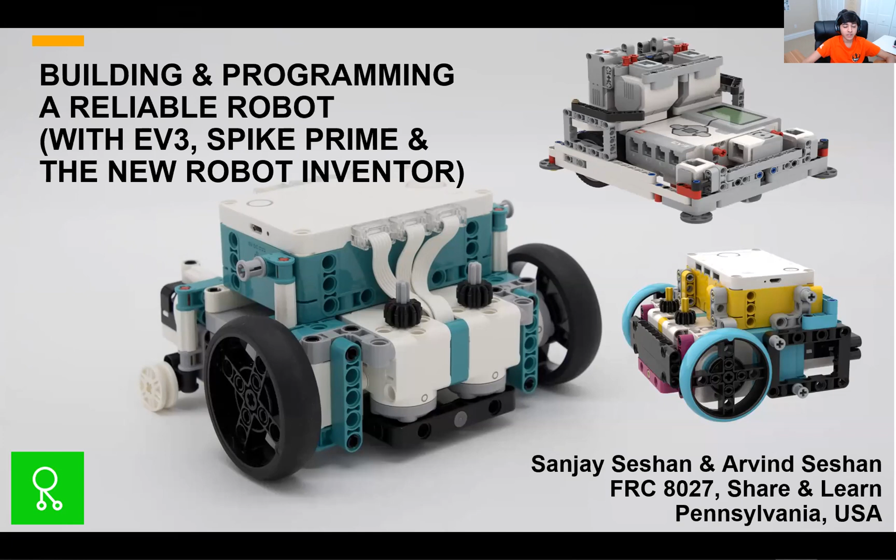So here's a little background on us. We competed in First LEGO League for 8 years. Most notably, we won the Champions Award at World Festival in 2018. We've been doing this for a really long time, as you can tell from the list of things we've done. We're also the founders, and we run FLL tutorials, Prime lessons, and EV3 lessons. Currently we are the co-captains of FRC 8027.

As mentioned earlier, we are going to be talking about reliability today. You might be wondering, why focus on reliability? Firstly, reliability is the number one challenge that teams face. Second, robots often tend to work at home, but you do not get the same results when you go to a competition and run it on competition tables. Third, robots only complete the mission correctly sometimes - for example, you may have a low success rate for a single mission. And fourth, because of the first three, teams get frustrated. We are going to be discussing all of these in the following slides.

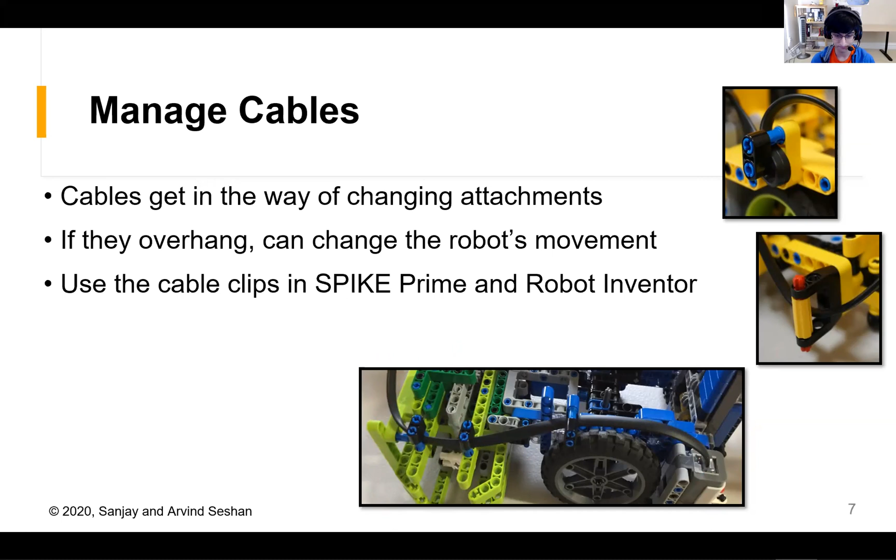Also, somewhat related to the wires, you need to keep your access to your ports open. For example, you need to make sure you can charge your robot. You either have to leave a hole open to replace the battery or to charge it. And that is this hole on the back of the battery if you're using an EV3.

Also don't forget to leave the download port open, because at competitions you're not allowed to use Bluetooth. And of course, leave your wires for your motors and sensors. But note, on the Spike Prime, the download port and the charging port are the same USB port, so you only have to leave one port open.

And actually, on another note, you cannot just take out the battery and charge it separately. You have to have it plugged into a hub in order to charge the battery.

And everything Sanjay just said about the Spike Prime also applies to the Robot Inventor. Yes.

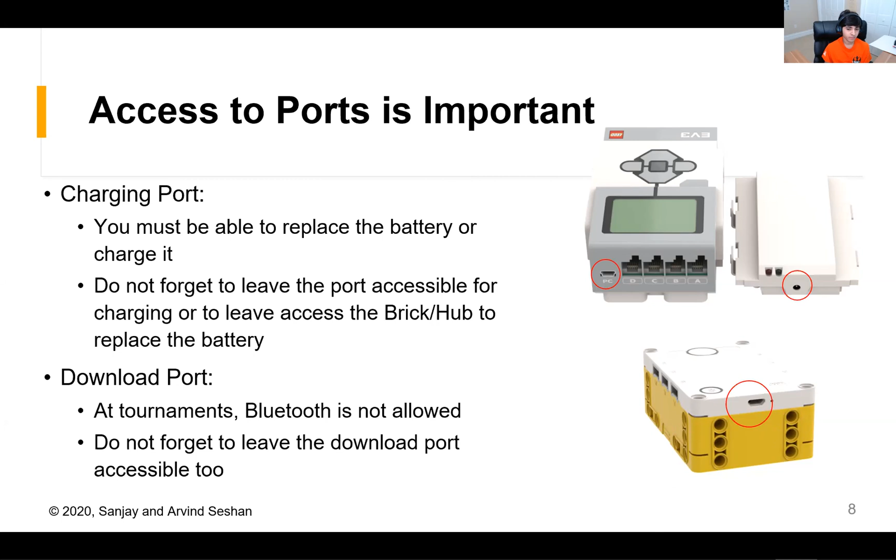Next, we want to talk about how you can build a robot that navigates reliably. There are three things that we recommend. The first is having an outer wall. An outer wall will help keep your wheels straight and not bow or bend out, and it also allows you to align on walls as well as ride walls. We'll show examples of this in just a second.

The second thing is to use color sensors. Color sensors can be used to line follow on lines that are on the field, as well as square up on those lines. And finally, as I mentioned, wall riding helps you stay straight, and that can be done not only by having that outer wall, but also sometimes having riding wheels along the wall to help make the riding more smooth.

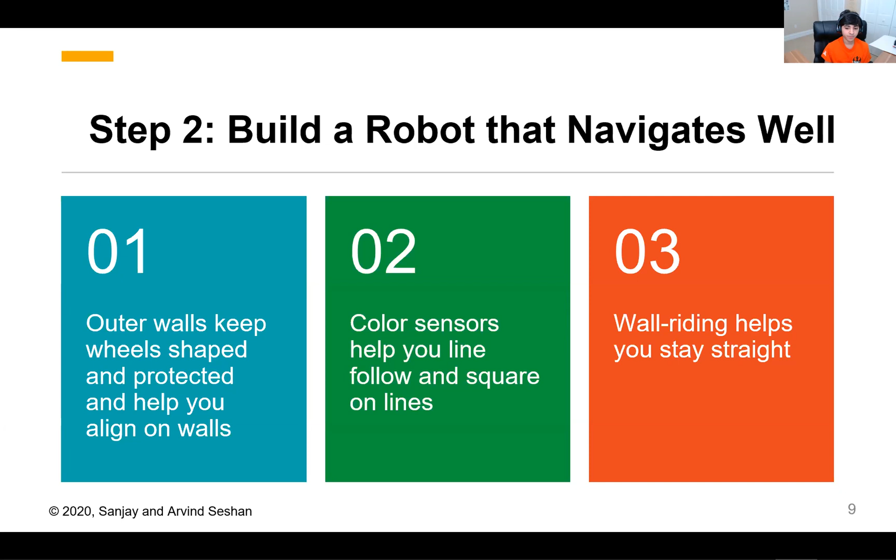Now let's look at how we can apply these techniques in action on an actual competition robot.

This is an example of DroidBot C, and as you can see, it has an outer wall. An outer wall is basically a set of lift arms that go around all four sides of the robot. The lift arms on the front and back allow the robot to drive into walls and straighten out. The outer wall on the sides allows it to ride along walls. And if you notice in this build, we actually added wheels along the outer wall to allow it to ride along more smoothly.

There are two color sensors that are separated from each other at opposite sides of the robot, and this is to make the squaring up on lines more reliable. They're also far away from the drive wheels so that it makes the line following more reliable. You also notice we have a low center of gravity with the brick being low down. This will prevent jerking, and there's also level construction, which is important for weight balance.

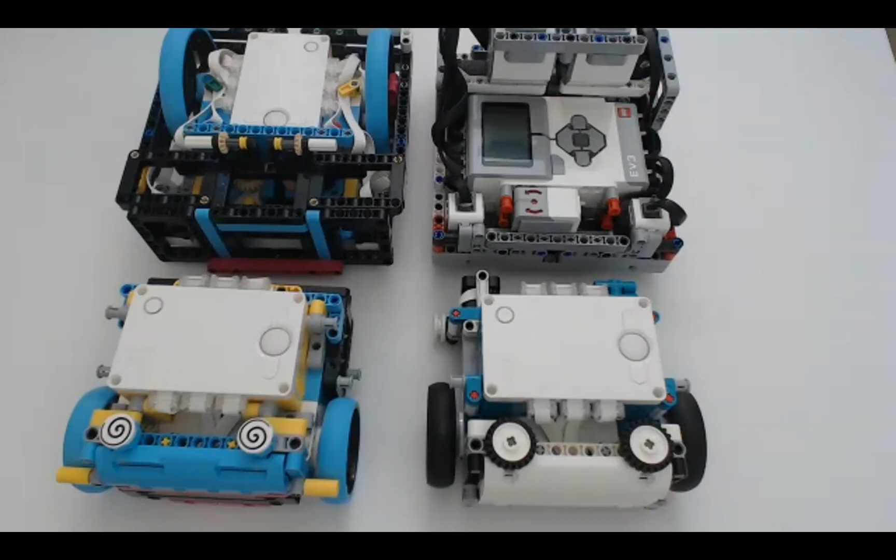At this point, I would like to switch over to an overhead camera to discuss how these features can be applied to different designs.

So this is an example four robots. The DroidBot C, this one is the one we just looked at. Now let's try and identify similar features in all of the other robots.

Let's start with this one here. This is DroidBot E. DroidBot E has that same outer wall that goes around the entire build, which keeps the wheels sturdy and can be used for the same purposes as DroidBot C. Also notice that there's a low center of gravity to prevent jerking, and also a level construction.

These two robots, this one is built using the Spike Prime, and this one using the new Robot Inventor set. These are attachments, but we'll talk about those in a second. There's a flat surface in the front and back to allow for aligning on walls. To make this build as small as possible, which was the goal here, there is no outer wall, but it isn't too necessary in this case. These robots also use very minimal parts and are connected very well in a sturdy way.

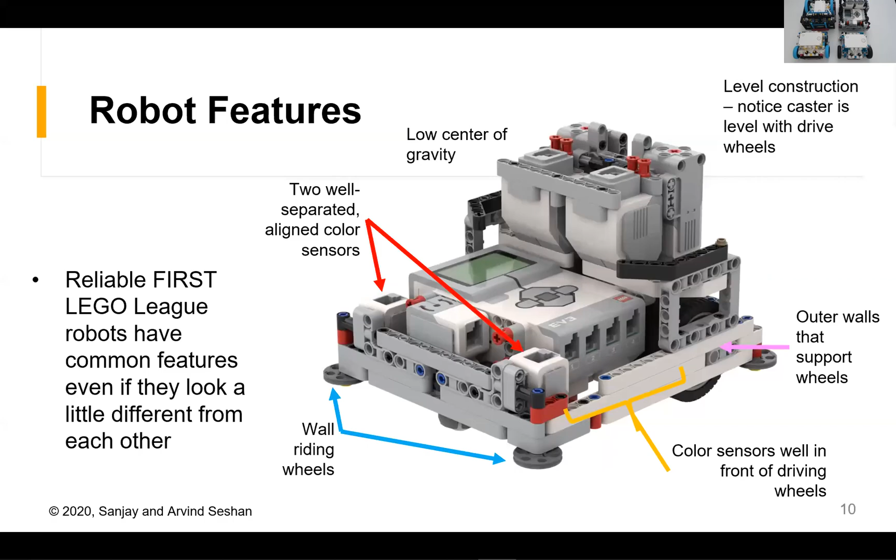So I kind of went over the next few slides live.

Next thing I want to talk about is some aspects you have to consider when designing your robot. The first is height. Notice I was talking about how all the robots had a low center of gravity. Top-heavy robots tend to be very imbalanced, and when they drive quickly, they will jerk, meaning when they stop abruptly they will tip forward or backwards. This is not something you want, so having a low center of gravity solves this issue and also allows you to travel at faster speeds, reducing time as you travel across the board.

The next is weight balance from left to right. You need to make sure the robot is symmetrical so that you don't have more weight on one side, which can cause the robot to not drive straight and swerve.

Next thing to consider is the size of the wheels you use. Large wheels are fast, but they are harder to control and tend to be less reliable than smaller wheels. You should find a good balance between a large and a small wheel to maximize your speed and reliability.

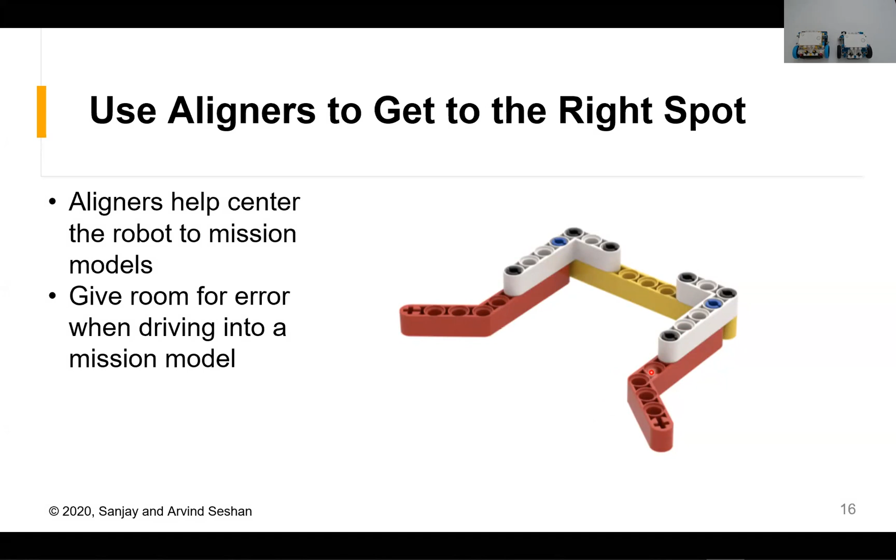Next, we're going to talk a little bit about some attachments. The first one we call an aligner. The way this works is we have these two bent lift arms on the edges, and you can use this when going into a mission model to actually straighten out your robot. This allows you to have a little bit of a margin of error when going to complete a mission.

Arvind, did you have some attachments that you could show us? Yes, and I will show them right now.

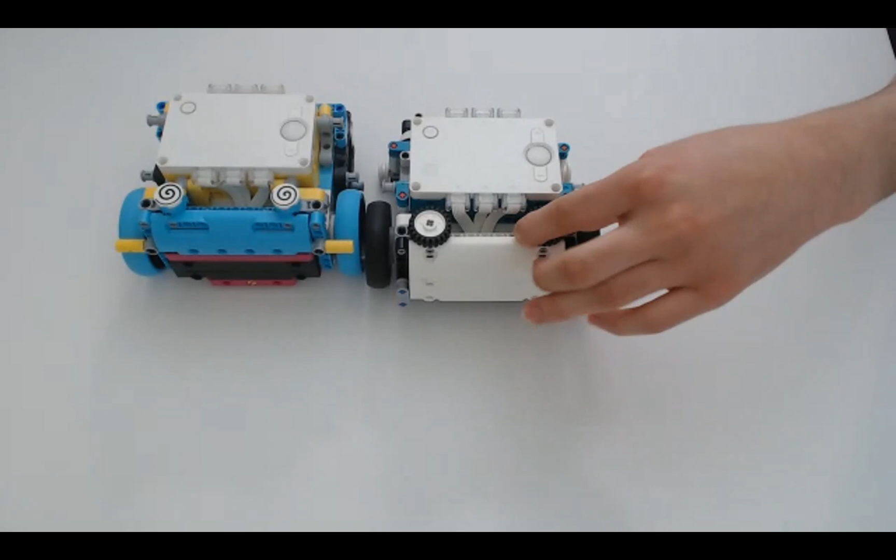So these are the two robots I was showing earlier. This is an example of an attachment that comes on and off very easily. It actually uses this gearing mechanism where the gears will mesh with each other when the attachment is placed on. Notice that the axle here sticks out one past the gear, and this is to make sure the axle goes into this lift arm here, so that there's no slipping in the mechanism when it is on the robot. This robot has a very similar mechanism with the same gearing.

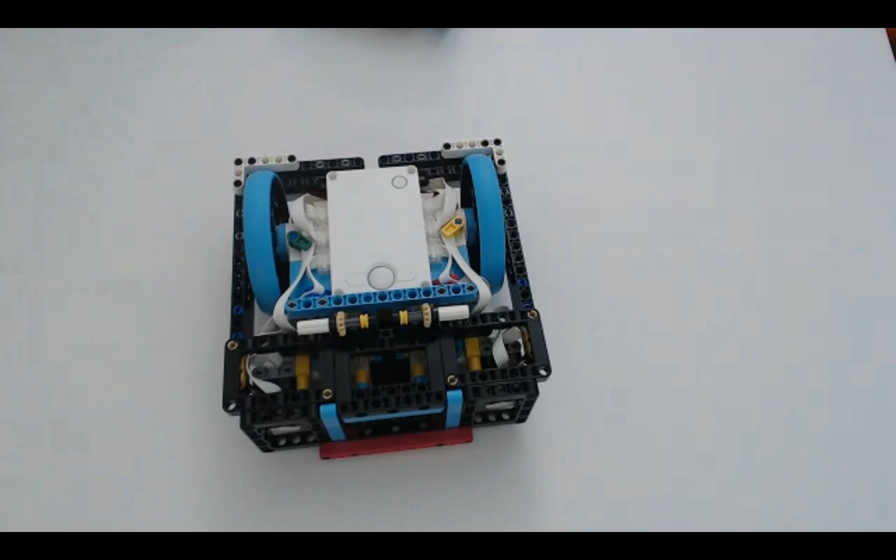The example in the slide was with this robot, which has a larger attachment that goes around the sides as well, and has the gearing on the bottom and an axle that goes into the attachment to make sure there's no slippage. This reduces time you have to spend in the launch area setting up your attachment, because it comes on and off very quickly. Now, I know Sanjay was also talking about aligners, so I wanted to show an example of an attachment that we created that uses aligners.

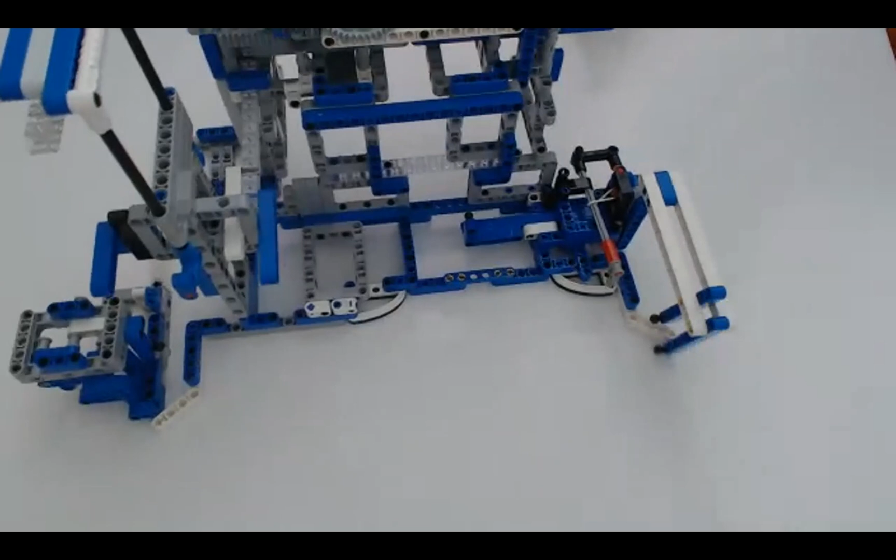You can immediately notice here that there are two sets of angled pieces. This is a lot wider than the one Sanjay showed because the mission model we were trying to align on was very large. So there's an angled piece here, and another on the other side. There was also a section here that we could align on. We use these pieces on the left and right to straighten up, and there are several different pieces you can use. If they have a curved shape, that's nice for aligning because it gradually centers the robot to the right location.

Another thing that I wanted to show were some attachments. Sanjay, did you want to talk a bit about passive attachments, and then I'll show an example?

Yeah, the next attachment we want to show you is called a carabiner. Arvind, can you show that on the screen? So this is a carabiner, and if you have something that is hooped, for example, or a closed object, the way this works is it has a lift arm connected to a rubber band on the top, so it's essentially like a locking mechanism. When you push something in, it becomes stuck inside until you remove it by hand. This is great if you have a hoop or any closed object that you want to capture.

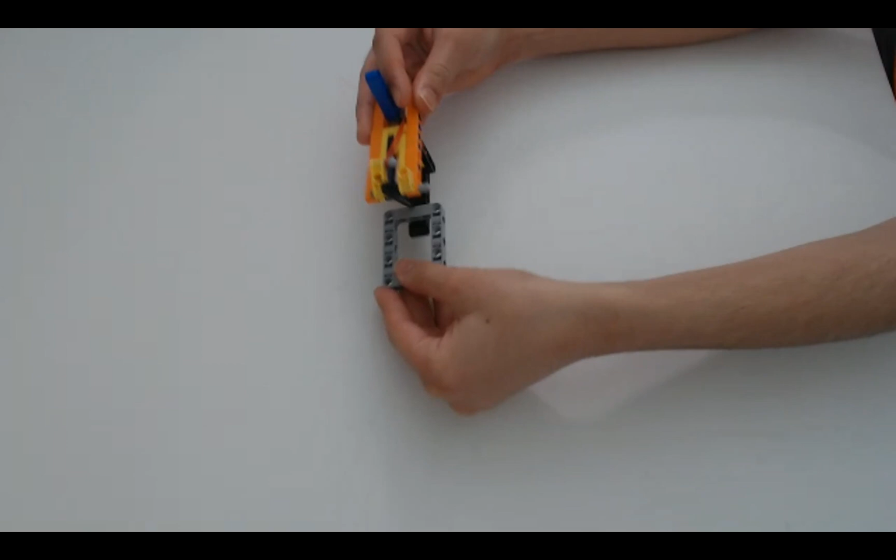So this is just my example of something you'd want to grab, and it can come in but not go out. This version uses a rubber band to make it want to go back, but there are some cases where you wouldn't need a rubber band. For example, this could just be gravity based, where it would go in and then gravity would make it want to come back if this was heavy enough on top. So depending on the use, you might not need a rubber band.

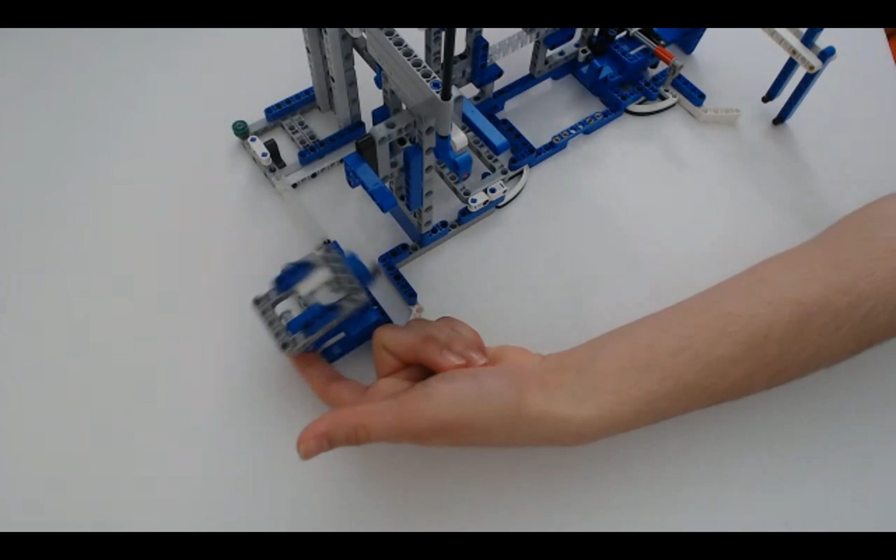I think we have an example that doesn't use a rubber band in this attachment again. At the end here, there's the similar concept of something that can go in but can't come out, and this is just gravity based. This particular attachment also had an item in here that was dropped off as it picked up a hoop, which is interesting as well.

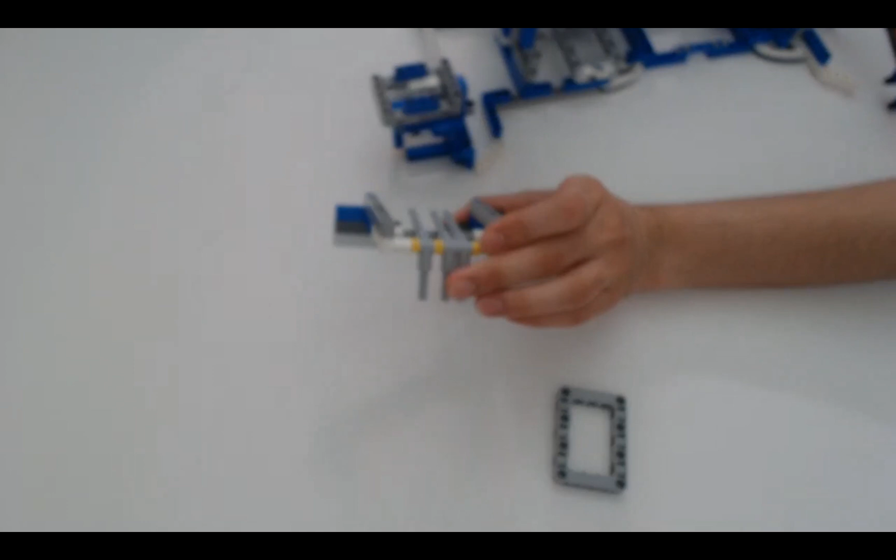While I'm showing this, there are other examples of passive attachments you can create. For example, this is a one-way curtain, used to collect items on the ground. It's similar to the concept of the carabiner, where it can go one way but not the other - hence it's called the one-way curtain. So if I had an object on the ground, it would be able to drive over and then pull it back with it, because these pieces are not able to go the other direction.

There's a few more here - some gravity-based attachments. Let's see if I can get a good angle of this. There's this piece up here, and the objective was to deliver some kind of hoop to a location. So the piece would go onto this part here, and this was a passive attachment actually triggered by a motorized attachment. As this gear rack went outwards, you notice how this dropped down, and so it would drop down and deliver something.

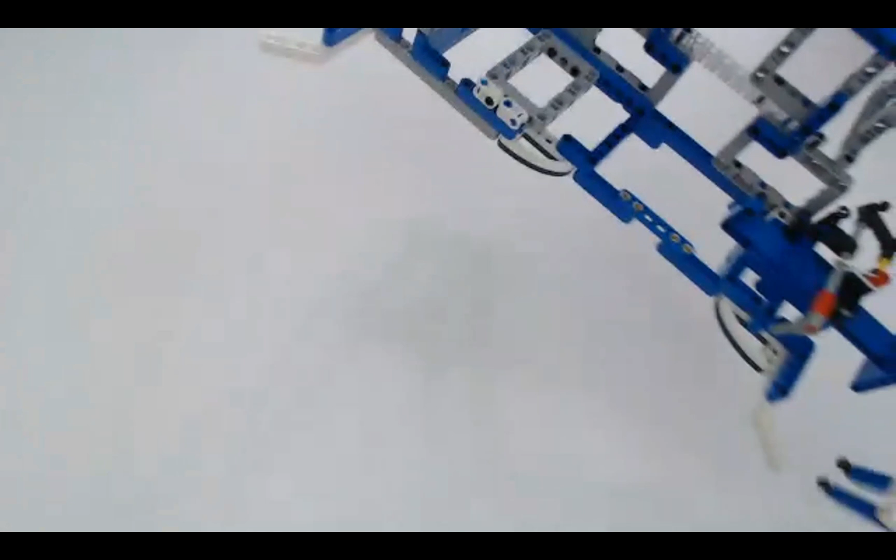So that's using gravity. On the right side here, we see a rubber band based attachment. It wants to push outwards, and it was latched down by this piece here, so that when it pushed into the mission model, this would shoot outwards and activate something.

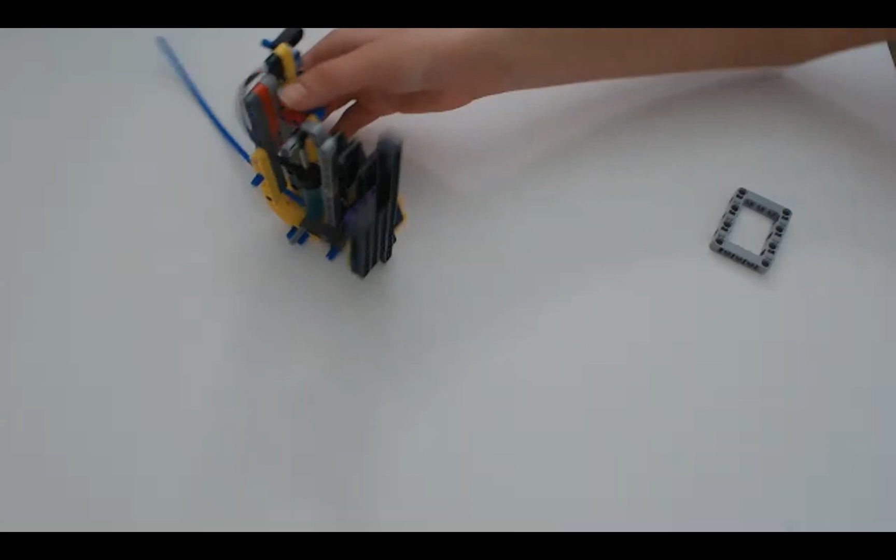I think I have a few more - this is an example of pneumatics, and this is a pneumatic piston. It's not hooked up right now, but there was a setup with pneumatic tubing and a pump and stuff like that. The idea here was translating the linear motion of the pneumatic piston into something that moves outwards. So as this pushed down, this pushed outwards, and it was used to activate the mission by pushing it.

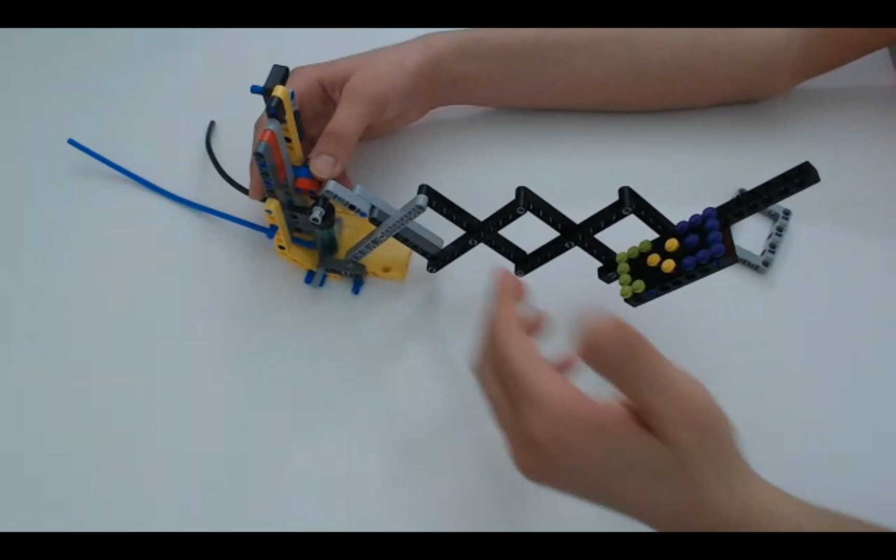Finally, there is one more example of rubber bands. This attachment has pieces at the bottom, and when it hit the ground, this rubber banded segment was released. There would be something inside this container held in by these pieces.

But once it hit the ground, this would come out, and those pieces would be released onto the ground. While talking about strength of attachments and building, I wanted to show an example of using these framed pieces as well as the idea of cross beaming to create something really sturdy. This was a gear rack for a rack and pinion system that extended all the way across the board, so it had to be very strong. You can see this is a very sturdy attachment that cannot come apart easily.

The way we did this is by using these frame pieces, and then, just like the example shown earlier, we put cross beams across it so that these can't split by pulling. Okay, that's all I had to show.

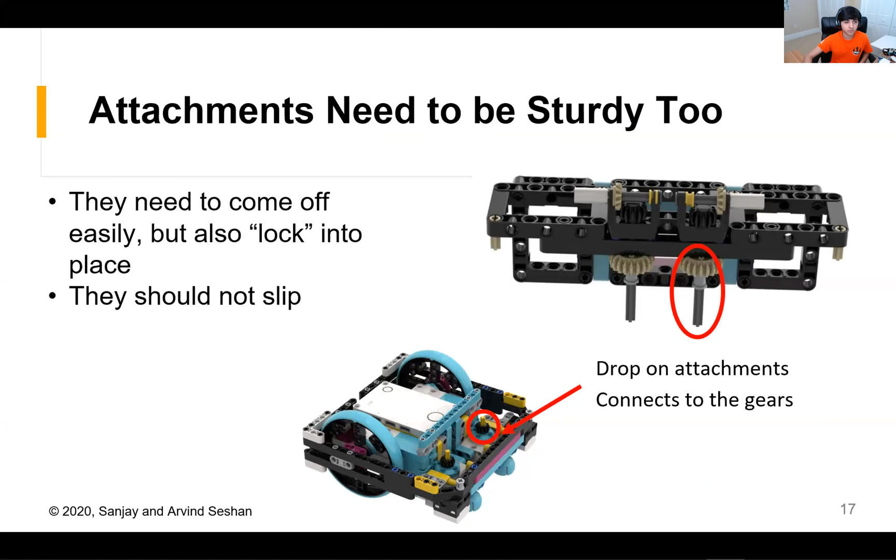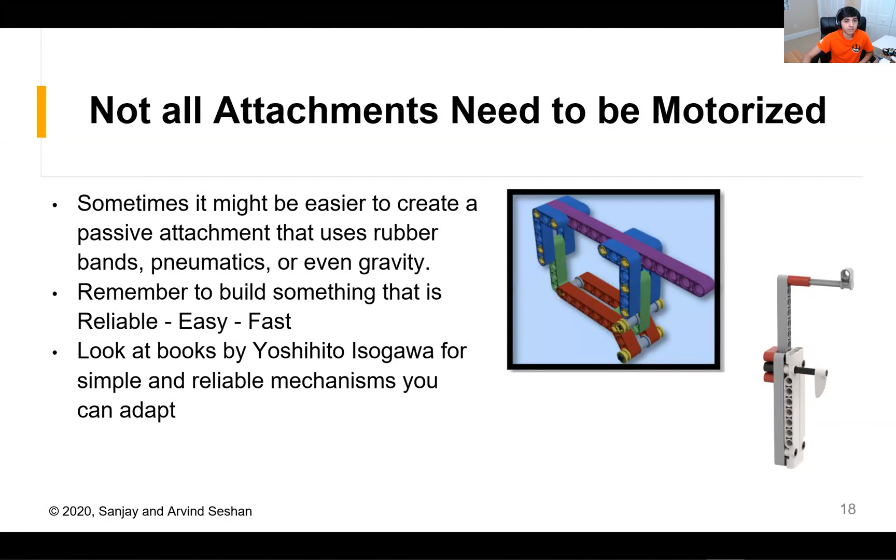These are just some of the attachments that Arvind was showing. Here's another example of a gravity-based attachment similar to one of the ones Arvind showed.

In conclusion, we wanted to let you know that you don't have to build something complicated. You can often score more points and be more reliable with something simple than something complicated.

We also wanted to mention that we know it's tempting to look at experienced teams and want to be like them and do what they're doing. It's also tempting to go online and look at solutions that are out there. We want to discourage you from doing that.

That's because, one, judges will recognize robots that you've taken from online. You should also consider whether that design even makes sense for the current season. And finally, team members often can't explain, repair, or program something they did not design themselves. If you do borrow ideas from another team or source, you should cite where you got it from.

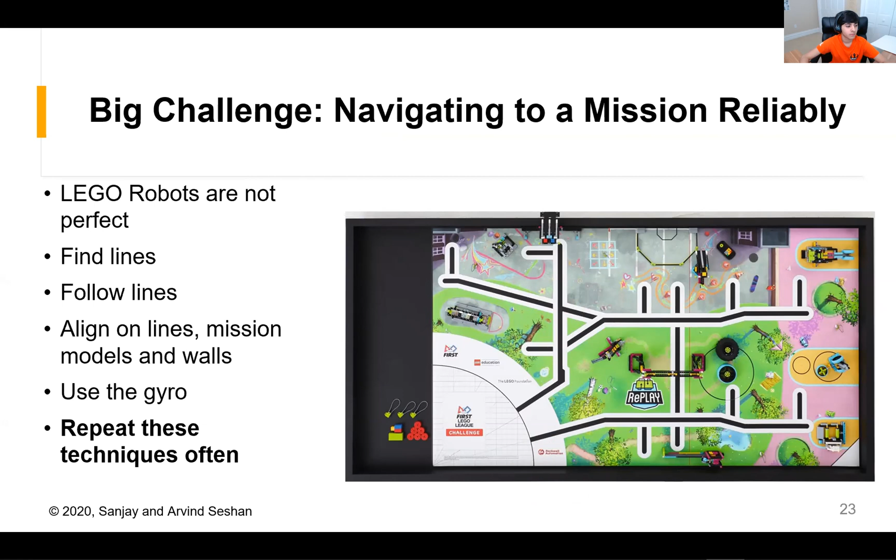Let's start by talking about how you can reliably find lines. A big challenge teams face when finding lines is that there are different backgrounds every year on the First LEGO League mat. You'll notice this year has a lot of green on the bottom, and when you're driving over these different colors, it might detect something as black before it actually reaches the line.

It turns out that green actually reads very dark in reflected light mode, if you're using reflected light mode to look for the line. So a few things we suggest: move for a certain distance before looking for the line. This ensures that while it's moving those inches before looking for the line, it won't stop early, because it's not looking for the line yet.

Another thing we recommend is instead of looking for black, there are some cases where you might actually want to look for the white that surrounds the line. This is usually when something reads very dark, or if there's black in the background along the way—it might be better to look for white if there's not much white in the background.

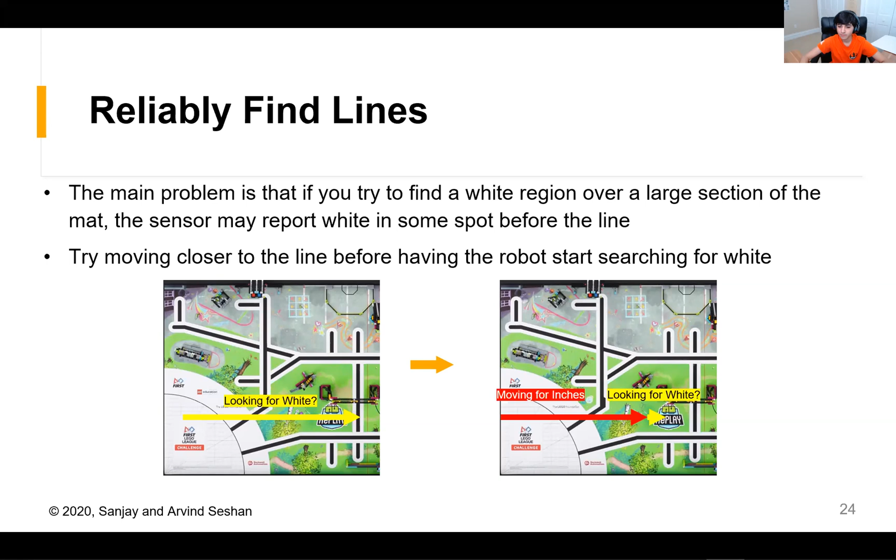In order to reliably follow lines, you have to first get to the line. I recommend using the technique Arvind just described to find the line—you can find either the white or the black line, depending on your scenario. After you find the line, you have to turn to become straight and parallel to it, and then you can line follow.

We recommend you pick and choose which lines you're going to line follow on. Choose the ones that are most useful, such as those that take you to a mission model like this one, or even this one that will take you across the entire board. Just keep in mind how you're going to line follow by moving to a line and turning, and which lines you're going to follow.

Next, we're going to talk about aligning on lines, or squaring up on lines. This removes the error in your angle, because it makes sure your robot is perpendicular to the line and you know the angle of the line. These angle errors add up because when you turn, there's always a slight error of a few degrees, and this will fix for that.

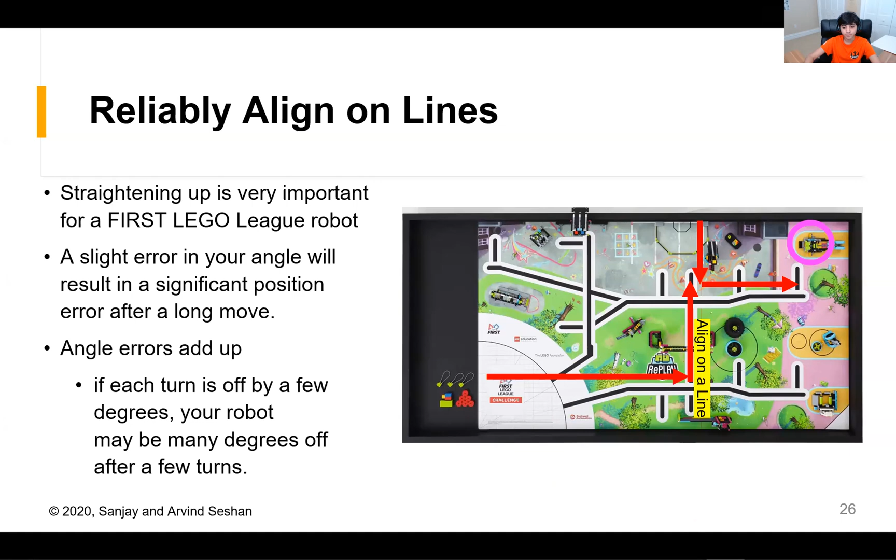The next technique is aligning on a wall or a fixed model. To align on a wall is actually quite simple: you take your robot and back it up onto the wall, and it will become perpendicular to the wall. To do this, you need two things. One, you need a flat wall, such as an outer wall as Arvind talked about earlier, on the back or front of your robot.

Two, you need to use the move-seconds mode of the move block. If you use move-degrees or rotations and your robot's wheels stall when backing into the wall, your robot will just hang there forever. However, move-seconds essentially times out. We recommend moving back into the wall for 1 to 2 seconds, depending on how far away you are, and it will time out without getting stalled.

You can use the exact same technique to line up on a mission model such as this one. Note that the mission model has to be very firm, because if you align into one that isn't, it will rip up the dual lock—and that's actually on you if the mission model comes out while aligning on it. So you need to be careful which models you align on.

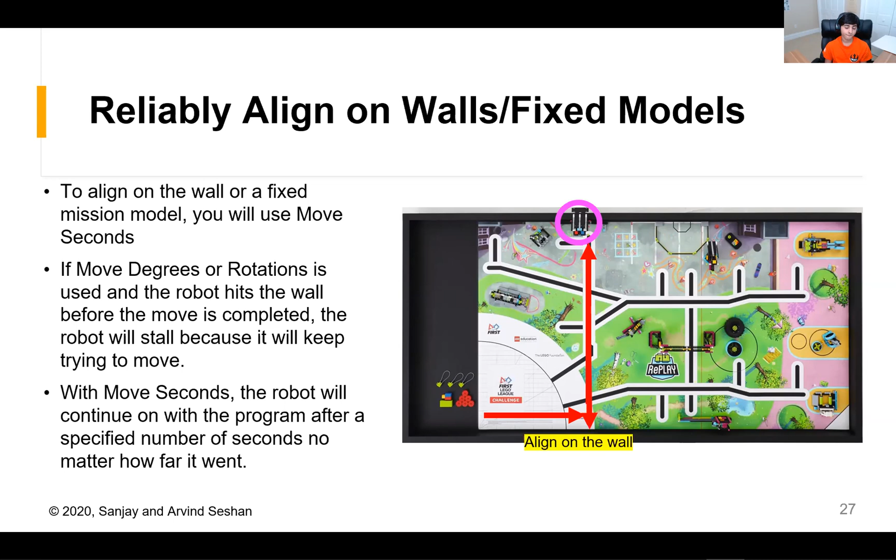Next, let's look at the concept of wall following. Wall following is another technique that makes sure your robot is straight, because your robot is going to be parallel to the wall. This can be done using an outer wall, as we described earlier, as well as wheels on the side of the robot, which will make it roll smoothly along the wall.

So you just drive into the wall, and as you drive into it, it will become aligned alongside the wall. One thing that Sanjay and I like to do is put a little bit of a curve on the move, which will actually make it curve into the wall to make sure it stays along the wall. Wherever we can, we like to ride along the wall, since you know exactly where you are when you're up against the wall, and you know that you're straight.

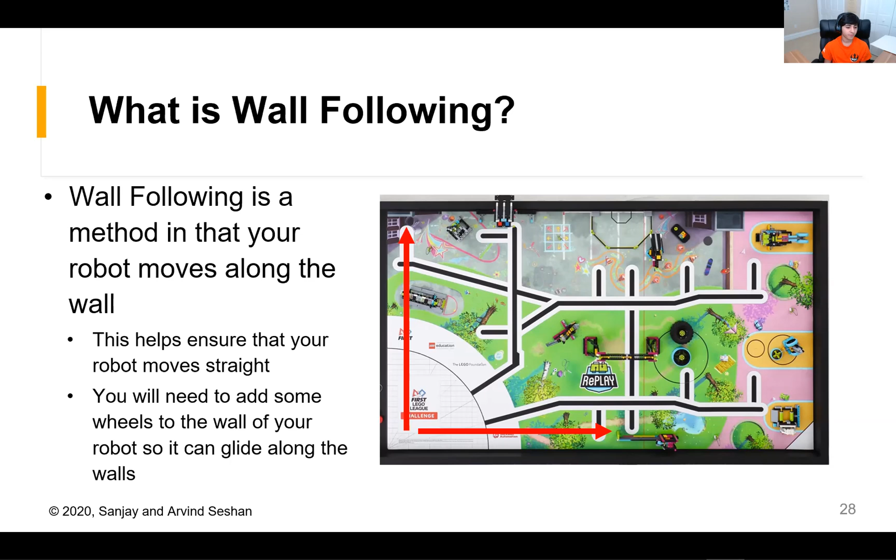So how can you reliably wall follow? It actually depends. One problem people have when wall following is how to get off the wall when you want to, and it depends on which direction the robot is facing based on what you need to do. A building solution would be to add wheels, as I mentioned earlier, which will make the connection between the wall and the robot smoother, so you'll be able to curve off the wall. However, a programming solution is to make it curve off very smoothly instead of doing a sharp turn.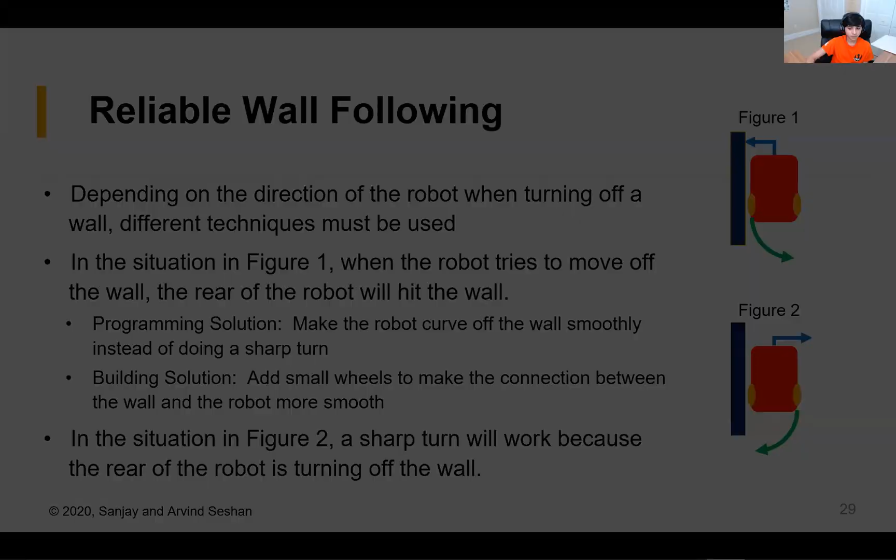I just want to answer a question in chat. We were talking about moving straight here, but you can also use the gyro for turning. If you want to make sure your turns are reliable, using the gyro is one way to do that. You can also look into doing proportional control on your turns, if you're familiar with that—a lot of teams use it for line following. You can also use it with turning to make the robot slow down as it reaches its target, making it more reliable, because the slower you turn, the more reliable it will be.

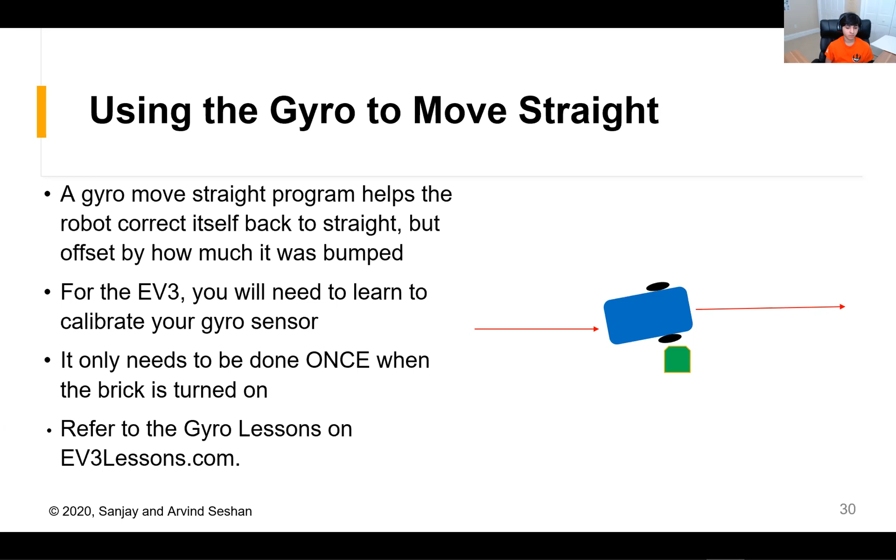Creating a gyro move-straight program is very similar to creating a line follower, because it's the same concept. You're trying to keep your robot's angle at 0, instead of keeping your robot's color sensor reading at 50. For more information, you can read the gyro sensor lesson on ev3lessons.com.

Next, we're going to talk about the concept of stall detection. Stalling is when a motor gets stuck before it finishes its move. For example, a motor arm is trying to move 3 rotations but gets stuck on a mission model and doesn't complete the movement. It will keep trying to move those 3 rotations forever, and you will have to grab your robot and lose a precision token. However, if you employ stall detection in your code, it will detect that the motor has gotten stuck and continue on in the code.

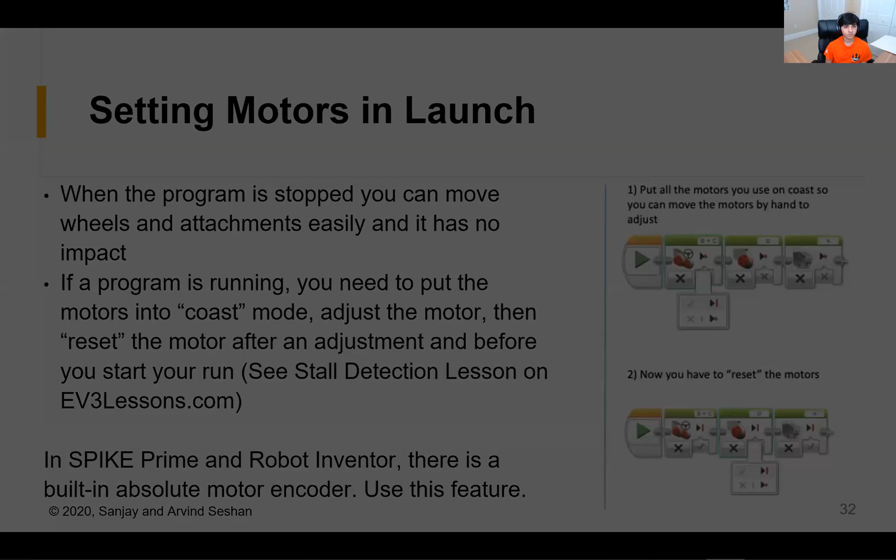Another thing you can do to ensure reliability is to test on different competition tables if you have access to more than one, since different tables are slightly different. You can also shift the mat to different areas of the board, as well as move the mission model slightly to account for some of the variation there will be at competition. These are good ways to test if your robot is able to still work, even with these variations.

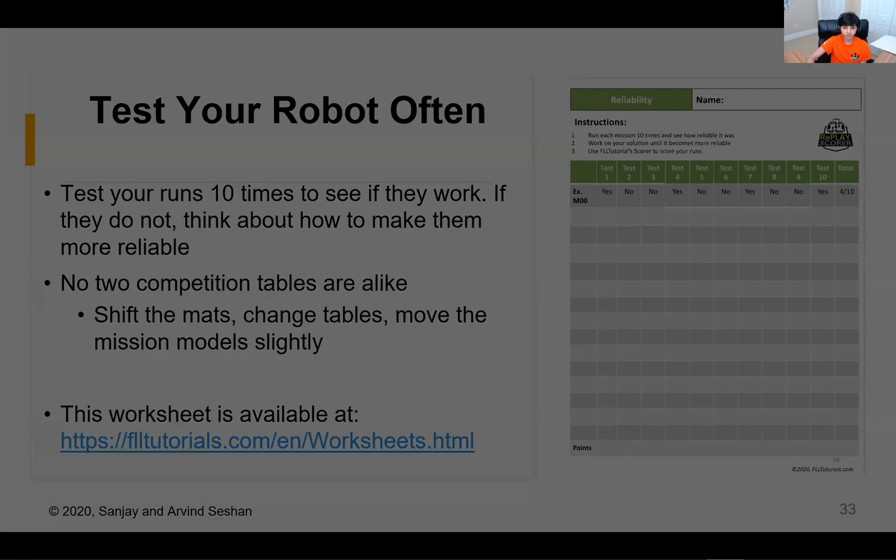In conclusion, there are 5 common reliability issues that we discussed. The first is if the robot does not drive straight. The common problems that cause this are the robot being unbalanced, the wheels not being supported well, or the tire being off the rim.

Second is that the robot does not reach the same location each time. We recommend starting at the same area in launch, aligning on walls, mission models, and lines, line following, and using aligners—basically all those techniques that we've been talking about.

If an attachment doesn't perform consistently, try to build it stronger, and start your attachment motors at the same spot every time. This is actually a lot easier with the Spike Prime and Robot Inventor because of the built-in encoder, or the built-in absolute positioning.

Next, if the robot moves an attachment arm but that attachment arm stalls, you can use stall detection. Finally, if the robot is crooked after line following, you can align again after the line follower, or you can learn how to do a smoother line follower.

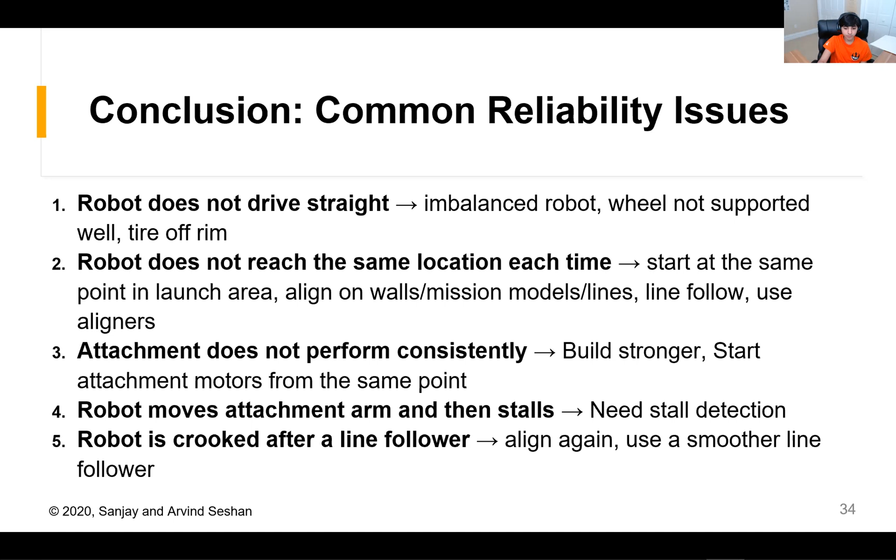And finally, you may be wondering, where can you learn more? Everything we have covered, you can find on flltutorials.com.

We have some starter robots and lessons specific to FIRST LEGO League. All the engineering journal worksheets that we were talking about can be found in the worksheets tab. For programming lessons for the EV3, you can go to ev3lessons.com. For the Spike Prime, primelessons.org. And for interesting mechanisms with LEGO that you can adapt for use in FIRST LEGO League, we recommend looking at the books by Yoshihito Isogawa.